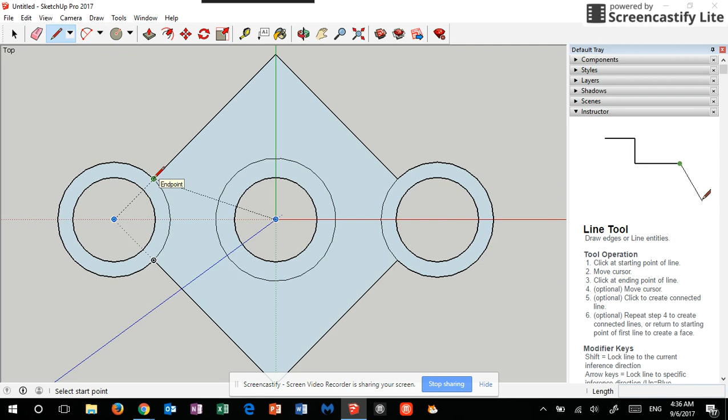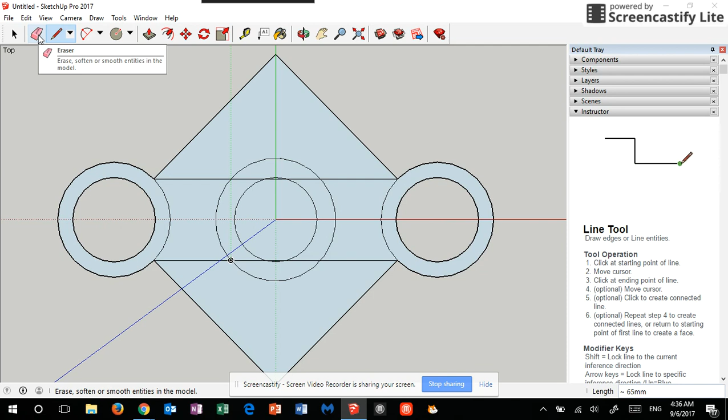So if I click here with the line tool, notice it's giving me a straight line, and then I touch the exact same place on the opposite side and click. That filled it in, but don't worry, we can get rid of it. I'm going to click here on the bottom and then go to the other side and click there. Now let me erase this outside corner. I don't need that anymore.

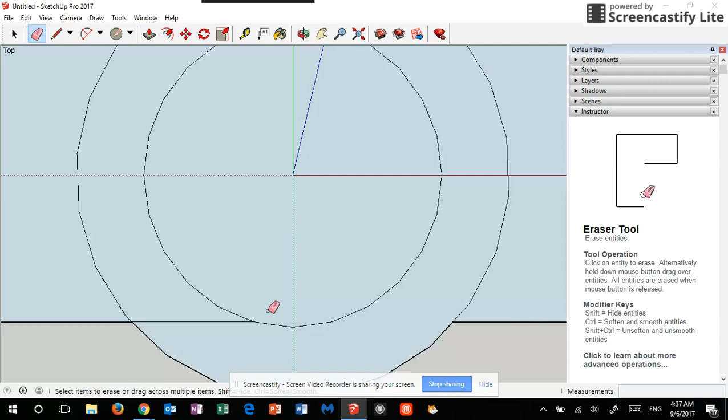And then I've got some other cleaning up here to do. We already know what to use for that. Let me zoom in and I can get rid of this piece and this piece and this piece by erasing. I'm going to pan by holding the scroll wheel down and holding shift. Erase this one and this one and that one. And then all I have to do is use my select on that center and delete.

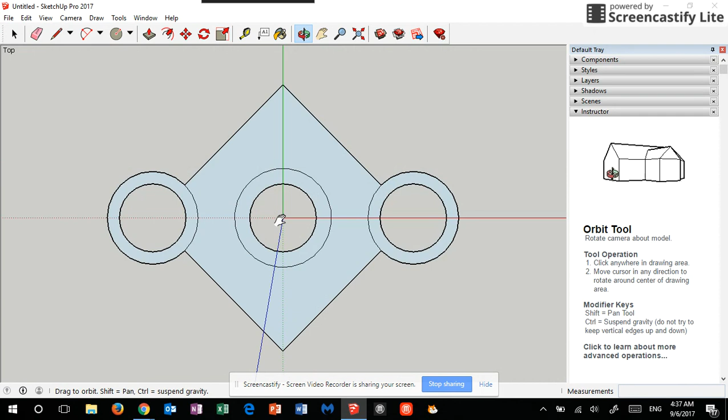And now it's a pretty simple looking 3D spinner base, but I don't love it. So let me try something different. I don't have to use the line tool. I could instead use this curve tool here, and there are lots of different curves. Let me drop this down here. There's arc, 2-point, 3-point, pie-shaped arcs. I'm going to use 2-point because that's kind of simple. I want to show you how that works.

I'm going to click here, and then I'm going to click on the other side, just like I did with a straight line. It's anchored at the same spot, but now I can bend the line as far out or almost as far in as I want to. I don't want to go right to the middle because it'll be too skinny and it won't work. Let me go down a little bit. I kind of like that.

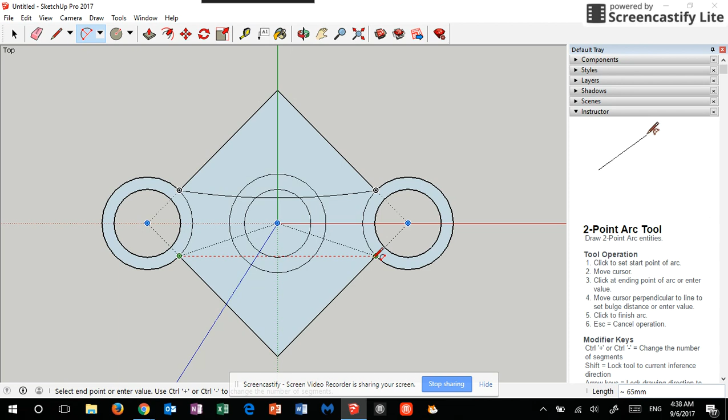Perfect. Now I'm going to do the bottom, and I could move out like that, so it kind of has a weird curve to the middle, or I can move it back in just a little, so it kind of matches the top, but comes from the other side. And now it's a matter of cleanup. So erase.

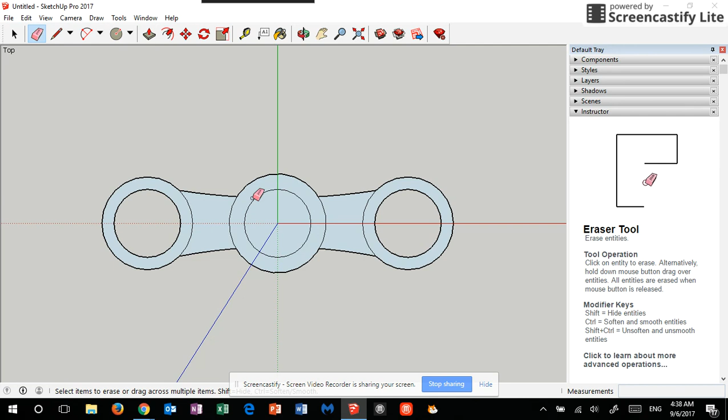Erase anything that's going to be in here in the middle where the bearing's supposed to go, and these extra ones here. And then let's select and delete. That's our 3 places for 3 different bearings. And I think that looks pretty good. Again, you can be as creative as you want to with all the arms you have. Use whatever tools you need, make it your own.

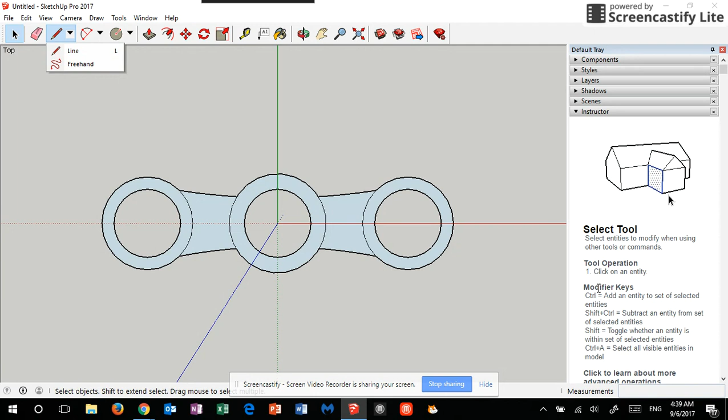There's one other tool called freehand that will let you draw crazy lines, but remember, we have to have this balance. So if you draw really crazy and big on one side and really skinny on the other, it's not going to be balanced and yours is going to wobble and possibly fall apart. So keeping it balanced, keeping things the same all the way around, is going to make it easier for when it actually starts being used.